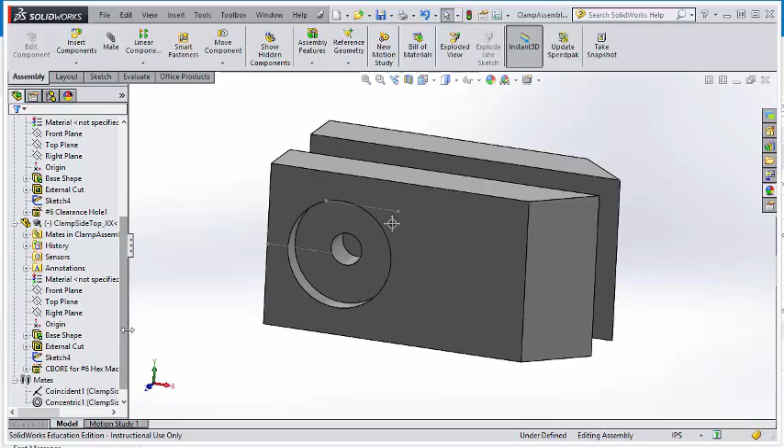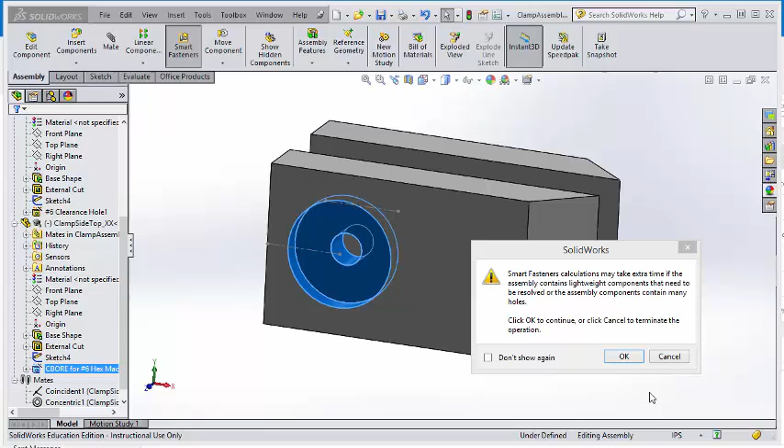So we want to select the counter bore feature from the clamp side top. Now, as you see on my screen here, I'll have to scroll slightly, and you may have to do the same. And then you single left click to select this C-bore for number 6 hex machine screw, and then click Smart Fasteners on the assembly toolbar. You may get a message advising you that the time to create smaller features or smaller components may take longer. You can click OK to accept this message.

It may take just a moment to populate, but after selecting your counterbore screw and then selecting the Smart Fasteners, the Smart Fastener tool should preload the information that you need here. If you navigate around, you'll see only the screw has been added, and there are no threads, no washers. We'll add those features here under these settings for top stack and bottom stack.

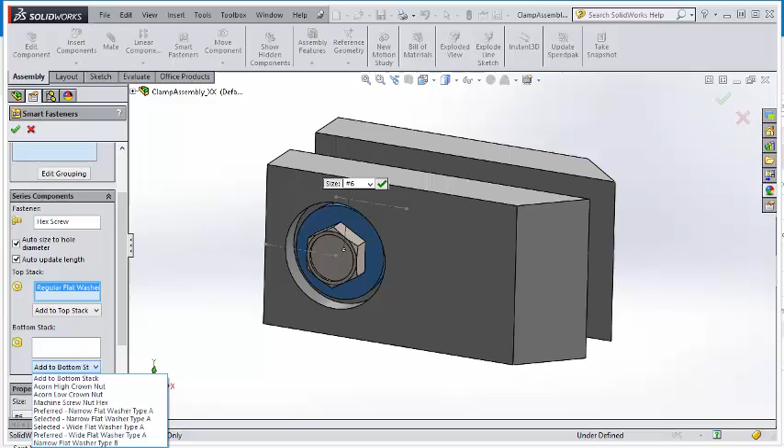Now, if we select under the pull-down menu here under Add to Top Stack, we can select an option for regular flat washer type B. After a moment, you'll see the regular flat washer type B loaded into SolidWorks, and it will be positioned under the number 6 screw. We'll also add a washer to the bottom, so we'll add the same type washer, regular flat washer type B. And if I navigate to the other side, you can see that corresponding washer added.

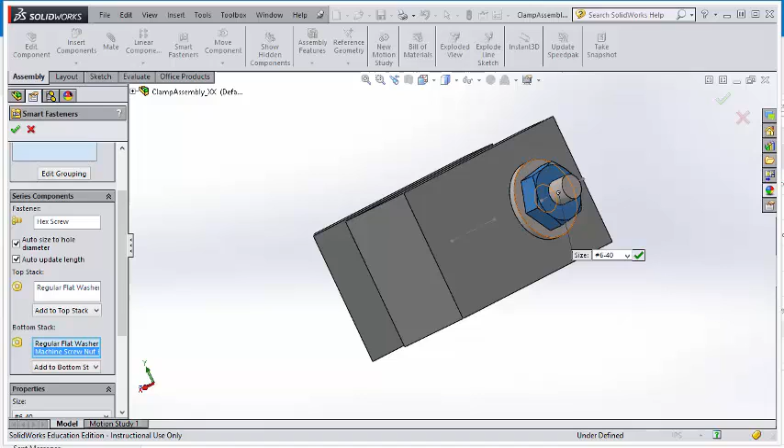Using the same procedure that we used to add a flat washer to the bottom, we'll also add a machine screw nut hex, which will also appear on the bottom. There are settings that we can make to this group that will update the type of flat washer and the type of nut used automatically.

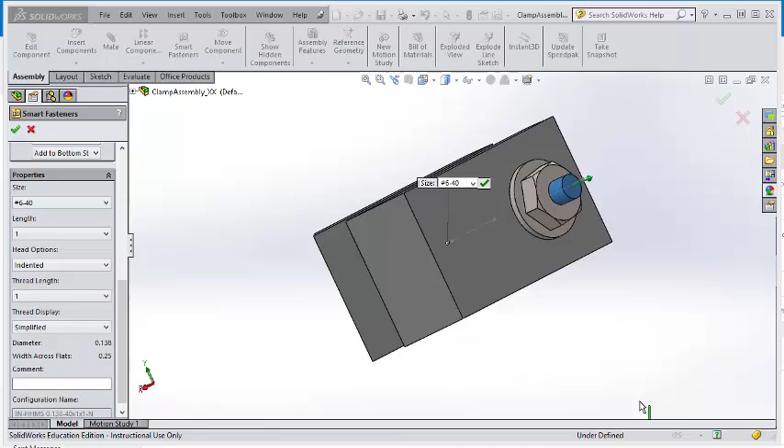Select on the group. If I scroll to the bottom, you'll see a set of properties. These settings should look somewhat familiar because they're based off the counter bore number 6 that we selected to begin our smart fastener. But we want to make sure that the settings are set up for the clamp usage that will require the clamp parts to expand and then get closer together as you clamp down on an individual object within the teeth of the clamp. So from this view, I have a good view of the clamp itself and then the screw so that we can see changes as we make changes here.

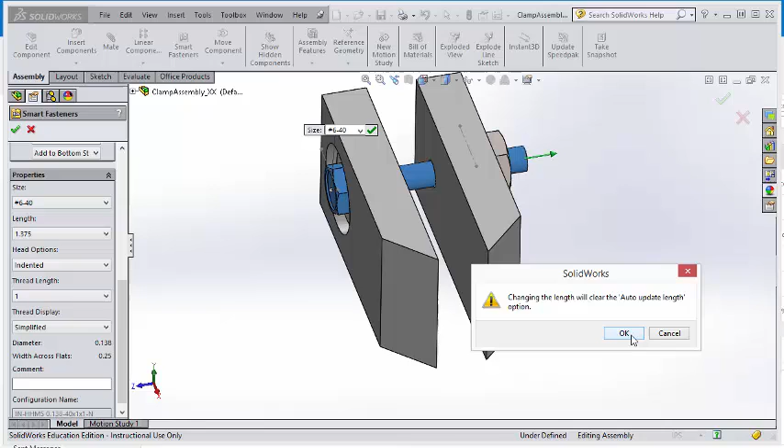First, we'll make sure that it is set to number 6-40, which is what we need. We're going to change the length to 1.375 inches. You'll get a message about clear the auto update length, and that's fine because we're adding a new length to it. We'll set the thread here to schematic. And those will be the only changes that we'll make to the properties. And then once we've made those changes, we'll click the green check here to accept our smart fastener.

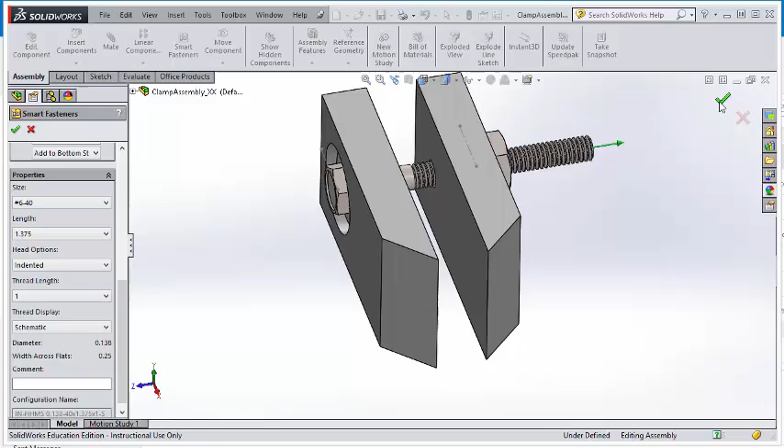The smart fastener is added to the bottom of the Feature Manager design tree, and if you navigate around the assembly, you can inspect the smart fastener. Before moving on to the next portion, I will navigate to the isometric view so that we can all start from the same viewpoint.

For the final portion of the lesson, we'll add some color to each of our clamp sides so that they stand out and are a little bit more distinct for reviewing within SolidWorks. To begin, in the Feature Manager design tree, single left-click one of the clamp sides. In this case, I'm selecting the clamp side top. In the submenu that pops up, you'll see the Appearance button, which is a multicolored sphere and has an arrow. Select the arrow beside it. You'll see another submenu that features the colors of the parts. Select the gray color to change the gray color in the clamp side top.

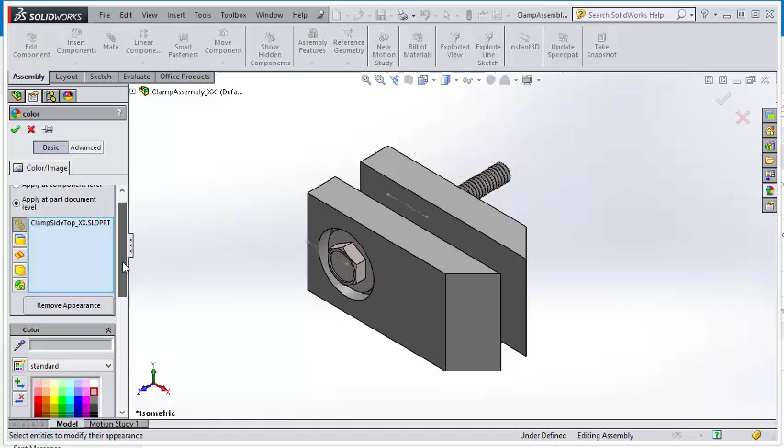You may have to scroll down in the color tool to see the remaining colors in the color palette. I'll select the green color. This is also the color that you will be instructed to use in the book. Click the green check to OK the green color change. Then we'll repeat the process for the clamp side bottom, which you may have to scroll up or possibly down.

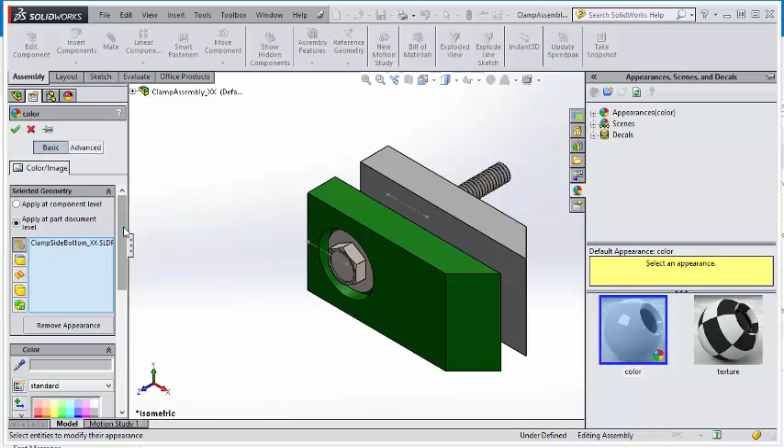Single left click the clamp side bottom, select the Appearance button, click the gray color that's currently being used for the clamp side bottom. Scroll in the color tool, and we'll select one of these pinks here. Click the green check to accept the color change, and then from the File menu, save your assembly.

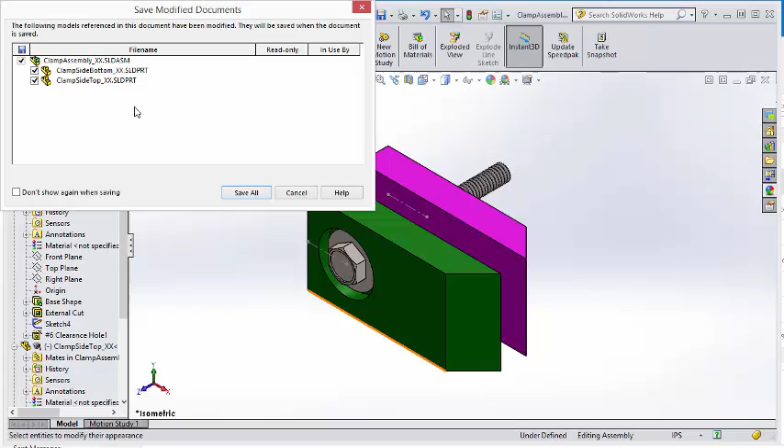You will be prompted to save the modified documents that include the clamp side bottom and the clamp side top parts. Remember, when we created these parts, they were individual files that we brought into the assembly. So now you're being prompted to save not only the changes you see in the assembly, but also the changes in the part. Now the assembly is complete. Try these changes yourself in Lesson 4 in the student manual.